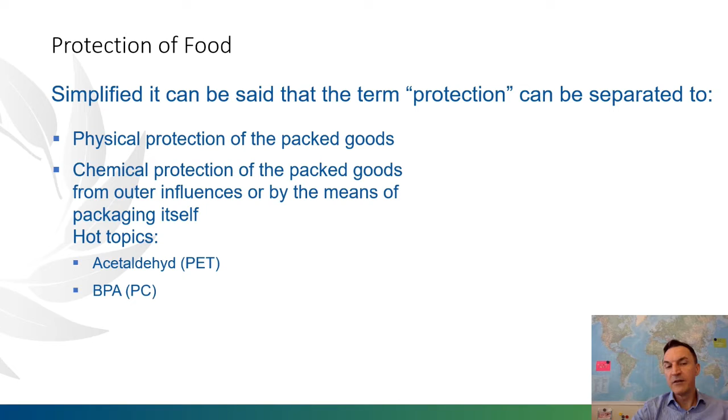I would like to shed light on 3 points: environmental friendliness, protection, and regulatory issues. Protection of food - simplified, it can be said that the term protection can be separated into physical protection and chemical protection of the packed goods. Here hot topics are acetaldehyde, BPA, MOSH/MOAH, or PFAS.

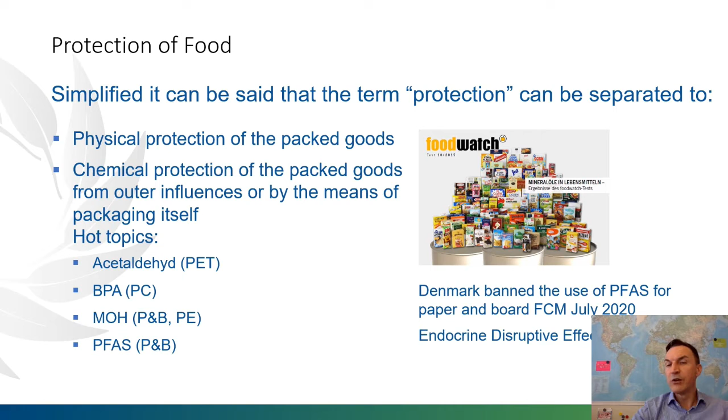For example, the use of PFAS, per- or polyfluorinated alkyl substances, to generate oil and grease resistant paper and board products is banned in Denmark since July 2020. And on a pan-European level, there are activities to regulate the usage in general, and this is up to 2021 to 2022.

Environmental impacts: the environmental impact of different packaging materials in respect of harvesting, mining, or the production of its raw materials, depletion of resources, renewability, and so on, the transport thereof, the production process, meaning the energy consumption, the creation of emissions, the usage, how attractive it is to return, the existing recycling schemes, reuse or littering, the end of use, meaning are there existing recycling schemes in place, is it a recycling or a downcycling, incineration, landfilling - all those topics have to be addressed.

And then there are the regulatory impacts. The regulatory and legal requirements of packaging materials have to be considered in geographical and timely terms. So as addressed before, there's the topic on MOSH-MOAH. The Mineral Oil Ordinance in Germany is still pending, but is going to affect the market environment.

The PFAS with its national or local bans, the Single-Use Plastic Directive, meaning the restriction on the marketing of different materials, recycling schemes, meaning the fulfillment of recycling quota, and food contact or other compliances required, as for example being gene-modified free, the nanomaterial topic, the BFR, FDA, GB regulation, being halal, etc.

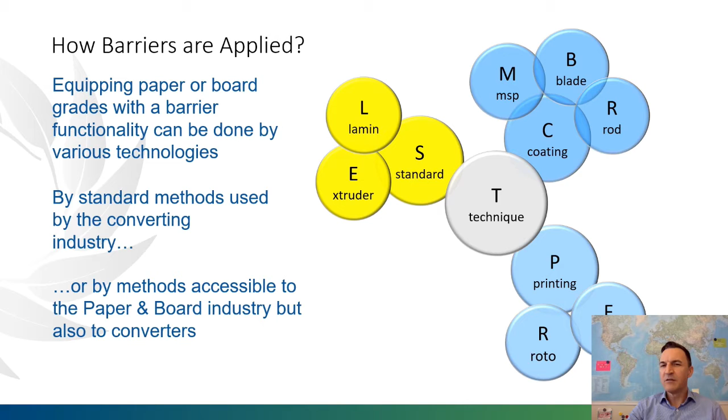So how are barriers applied? There are different technologies in place, coming from standard extrusion or lamination of polyethylene, to technologies used mainly at the converter site, meaning printing by means of roto or flexo, to the classical application methods known to the paper and board industry, like metering size press, blade, rod, or curtain coating, completed by other technologies like dipping, pond sizing, or spraying.

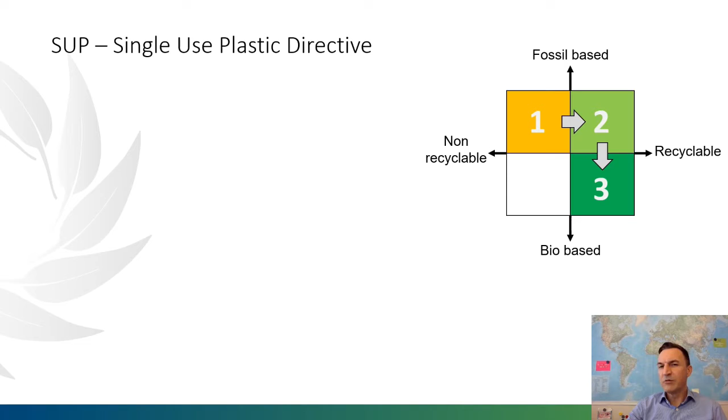The solutions in place can be non-recyclable or recyclable, fossil-based or bio-based. Coming from the polyolefins, which are non-recyclable and fossil-based, Omya introduced the Extomine portfolio, giving the industry the option to go for a polymer-based barrier functionality on top of fiber-based products.

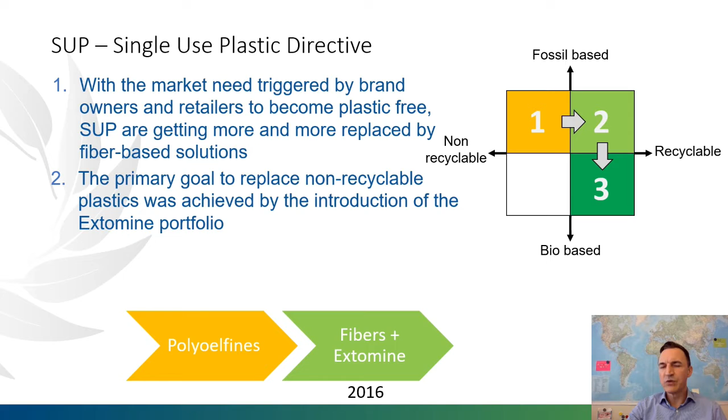Having learned that many potential customers were asking not only for fully recyclable solutions but also for bio-based ones, we introduced the Earth portfolio through the acquired company Solar Inks. Today, Omya offers the Extomine product family as well as the bio-based Earth product family. Depending on the specific needs the barrier has to fulfill, a single solution or a combination thereof meets the requirements of our customers.

For example, the Extomine M is a functional barrier to protect packed foodstuff from the migration of harmful substances like saturated or aromatic hydrocarbons. This gives the paper and board producer the option to use recycled fibers for direct food contact applications, or to use a functional barrier for virgin fibers, avoiding migration from secondary packaging or the environment itself.

Another example is for food wrapper applications. Here I would like to address the EarthGuard SPE, a bio-based barrier solution for food wrapping applications, giving the right barrier solution for oil and grease resistance, especially for lightweight packaging applications.

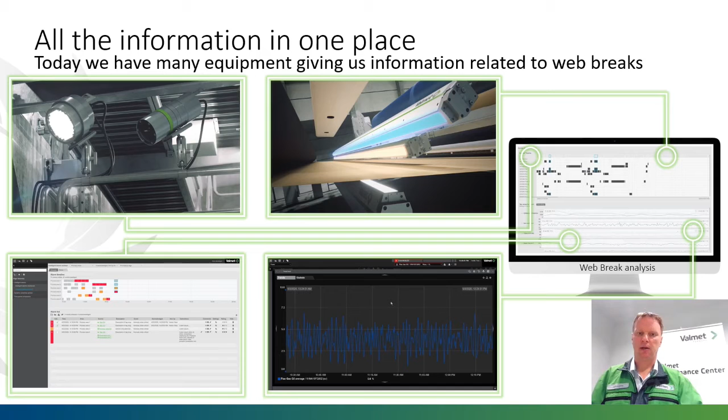The web break monitoring system shows web behavior with camera technology before the web break. This helps us identify the web break positions.

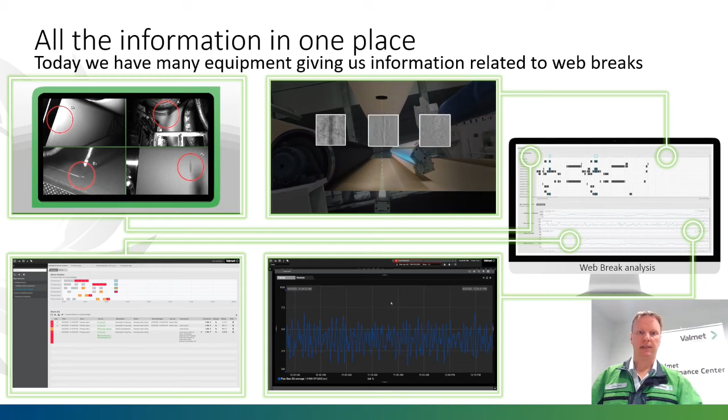Then there is the web inspection system, to see the dirtiness and holes and find out the relationship to the web breaks from the defects. Defects tell us the process cleanliness by showing the defects in machine and cross directions.

Then the sheet break logbook is a systematic way to find correlations to other web breaks, places and timings. Also, alarms from the automation system give you a hint of what went wrong. Then trends provide information about the process variable behavior.

Typically this information is in different systems and we need to go through all of them. Now we have developed an application which collects all the data and raises the most important anomalies from those variables which have correlations to the web breaks. The information is collected from different equipment and measurements.

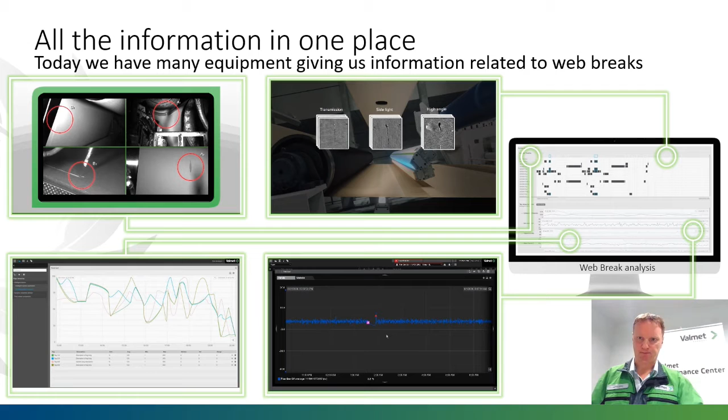As we know, when a web break happens, it means lost time and no production, but we still have operating costs like energy, personnel, chemicals, and other costs. We can only recycle the raw material and reduce it in production.

Here is an example from a container board machine, which is 7.8 meters wide, runs 1,400 meters per minute, producing 90 GSM testliner and fluting. If their profit is 100 euros per ton of produced paper, and total efficiency can be increased by 2%, they will earn 1 million annually.

Valmet Industrial Internet, together with the long-term performance development program, makes it possible.

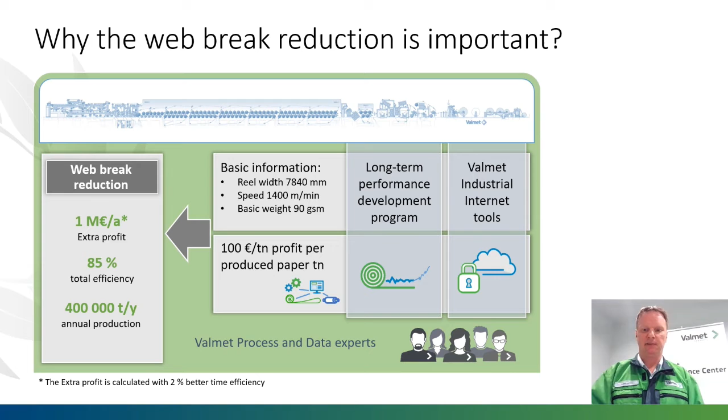Valmet is not only an equipment and automation system supplier. We have over 200 process experts around the world, and we solved 322 troubleshooting cases in 2020. This was done remotely. Also, 60% of commissioning professionals were supporting startups remotely. This kind of unique combination of technologies, automation and services is only in Valmet.

Now the focus is on developing new, more intelligent controls and soft sensors. As you can see, the advanced process control amount is small in paper and board machines, but in pulp mills we have over 3,000 optimizer references globally. So we know how to do it, also in the paper and board industries.

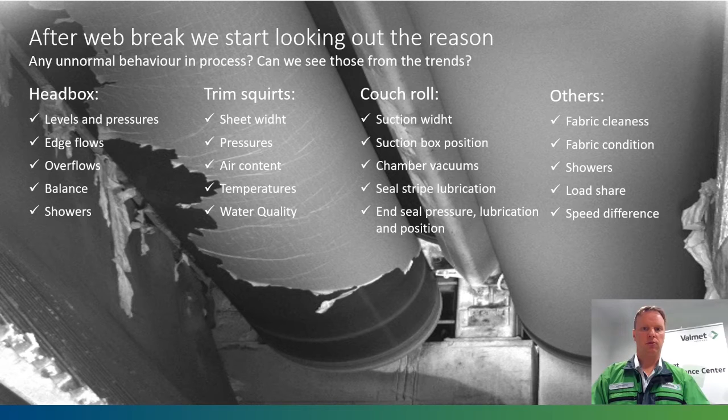Normally after a web break, we start looking at what has happened. One way is to look out for abnormal behavior before the web break from the trends. There are a lot of places which could cause the web break. Here are a few examples from the forming section, where we would start looking for the root cause. In the end, there could be a situation where we go through 1,000 trends before finding the root cause. This is very time-consuming and not an efficient way.

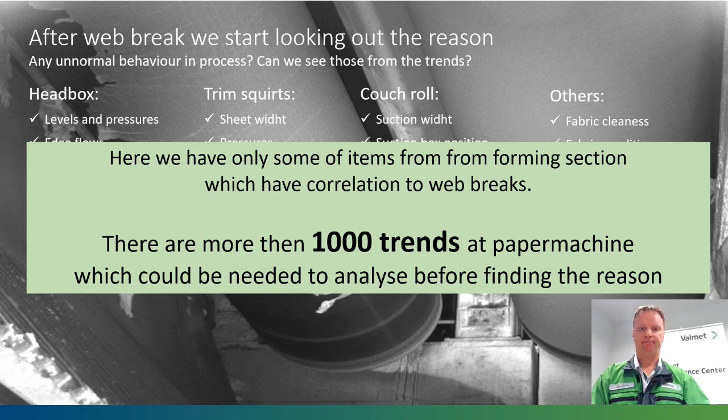The history tool will help analyze the web breaks later and find the root causes together with process know-how. The history tool can find recurring break reasons and statistics from previous web breaks. Next, we will show you a demo about the history tool application.

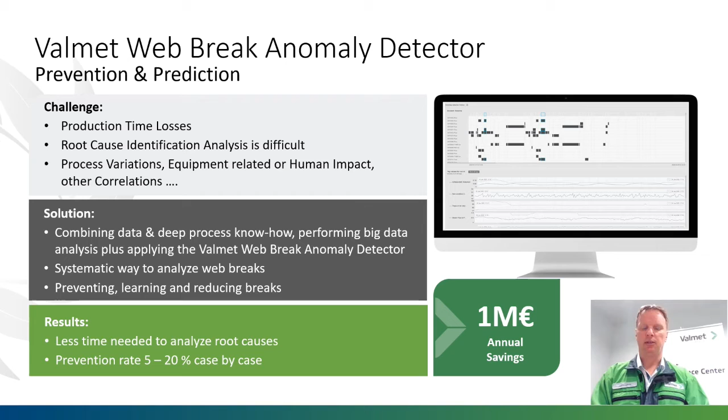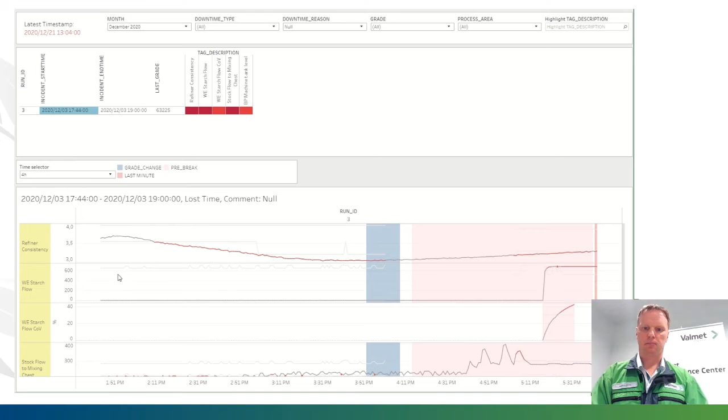You can select to see 4, 8, or 24 hours before the break. On the left side you can see all the tag descriptions, as well as the unit and the scale. The light gray area behind here is the upper and lower limit of the tag, the optimal range for that tag in that specific process state. As you can see, the limits are changing constantly because the process itself is changing a bit in the background.

Here you can see the tag trend itself. You can see that it turns red when it's going out of its optimal range, so when the tag shows abnormal behavior there. The blue area here indicates a grade change going on. During grade change we are not measuring anomalies in the process.

The pink area here indicates the pre-break section, so the time just before the web break when we are looking for those abnormal behaviors. The last minute of the run is indicated in red here. During that time we are not interested in anomalies anymore.

Going into more detail on this specific break, we can see that just before the break, the wet end starch flow rose very fast, and when the ramp is this quick, it is most likely to cause a web break. Here we can calculate different kinds of statistics of the tags as well. We can see the coefficient of variation of the starch flow here, and from that we also notice that the ramp is too quick for that measurement. So the ramp should be slower, and with that it might not cause a web break.

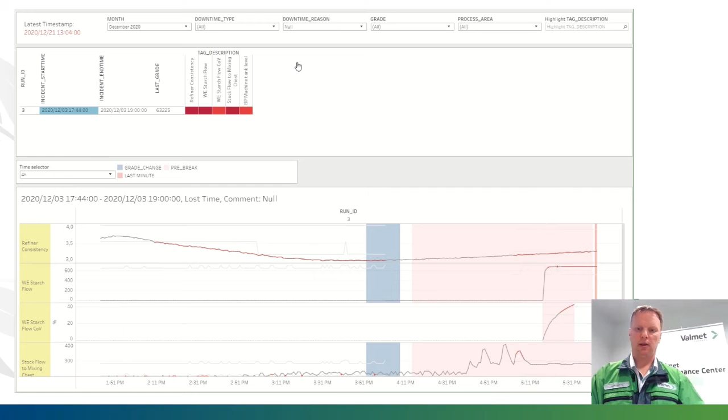Here we have a reference case, which is producing coated white top liner. Even though they don't have many web breaks on this machine, when the web break happens, it takes a long time before they can produce sellable product again. The customer can see benefit from the web break anomaly detector history tool in their daily operation.

It gives them a new way to analyze the web breaks and find the root causes. The application has already found items which they have developed and reduced the web break amount by 15 to 20%. The application showed items which they had not considered before. The improvement was done using the application and process experts from Valmet and the customer.

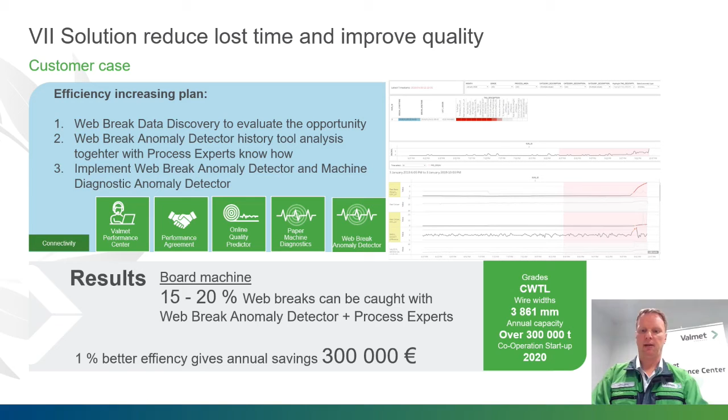As a summary, the Valmet web break anomaly detector helps you identify web break reasons using process expert know-how and data collected from different sources. We will provide you applications which can be used in your daily operations to spend less time on investigation and focus on development. It gives you the possibility to reduce web breaks at your machine. Process stability will increase, along with your total efficiency. Thank you for the opportunity to introduce Valmet web break solutions.